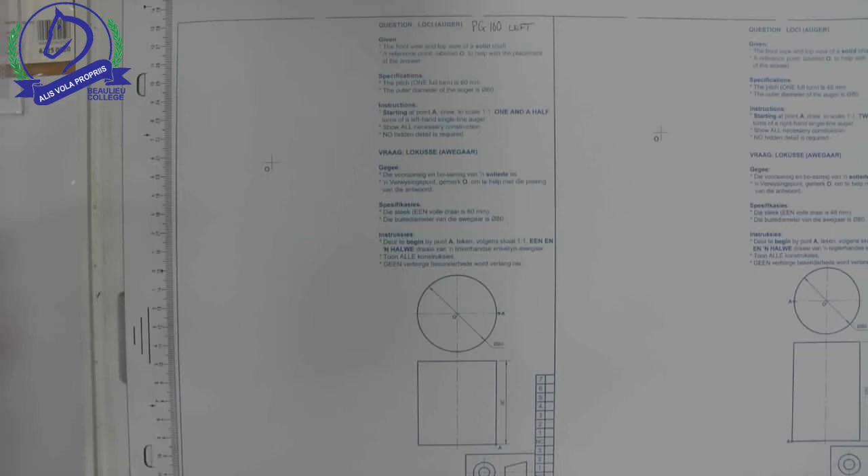Hello grade 11s. Today I'm looking at the Loci questions again, and this is page 100, the drawing on the left hand side of the page. They've given you a front view and a top view. Remember, this is in third angle orthographic projection.

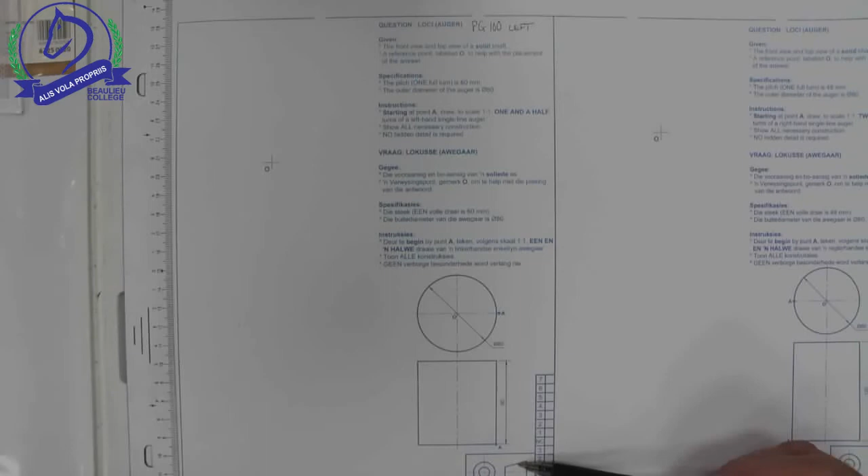They've given you the start point O, where they want you to start the drawing and help with the placement of your answer. They want you to do one turn is 60, a height of 60. Remember, we have to divide that by 12, which means that we're going to have a height that is divisible, and we can mark off height measurements of 5 millimeters. Starting point is A. Here is our start point.

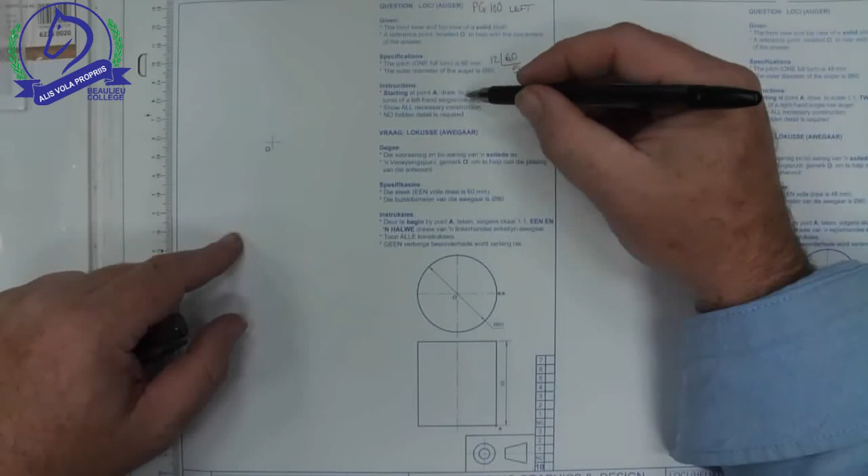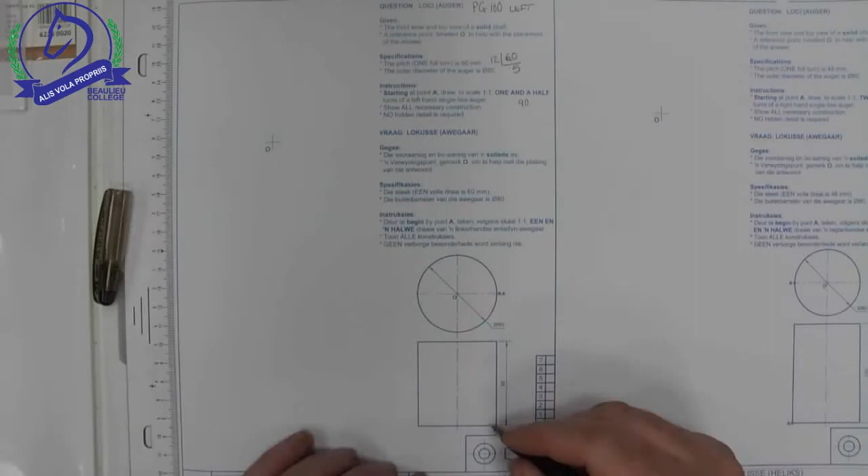They want 1.5 turns. So if it's 1.5 turns, 60 is one turn. Half of that would be 30. So that means our height should be 90, which matches the height that they've given us over here. It's a left-hand single line auger. So if it's a left hand, remember, if we're holding it in our left hand, this shape here, see the direction that our fingers are going, and that is the direction that we need to have, and it is 1.5 threads, 1.5 turns. So there would be one turn and a half. So something a little bit like that, just to give us an idea.

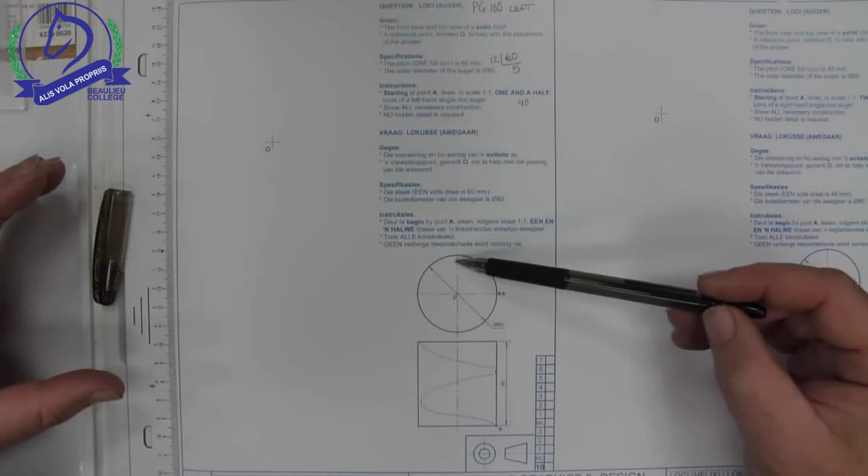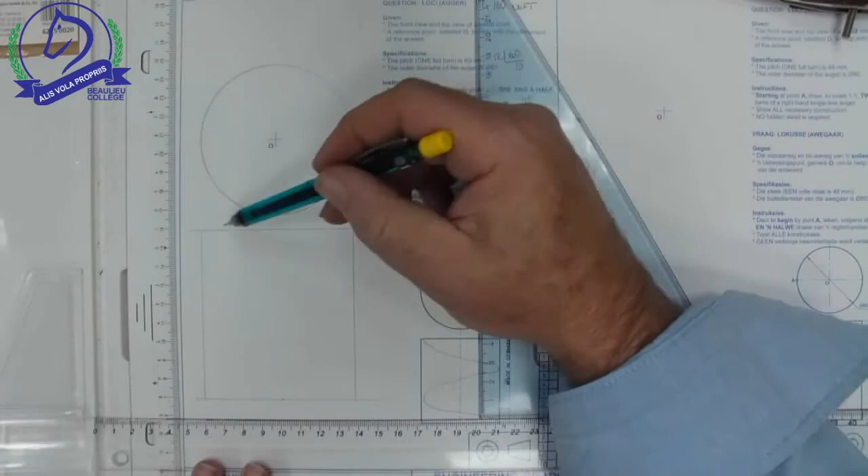So I'm going to follow the same process that we've done before. Try and remember the process. Draw the circle at our start point there, and let's draw our rectangle. After that, we're going to put in our pizza slices, and then we must also mark off the height divisions in our rectangle of the front view. There is my given circle with the diameter of 80, and the given rectangle with a height of 90, and that length which is equal to the diameter of 80. Next step is my pizza slices. Remember, this is going to be a center line, so might as well put that in here now.

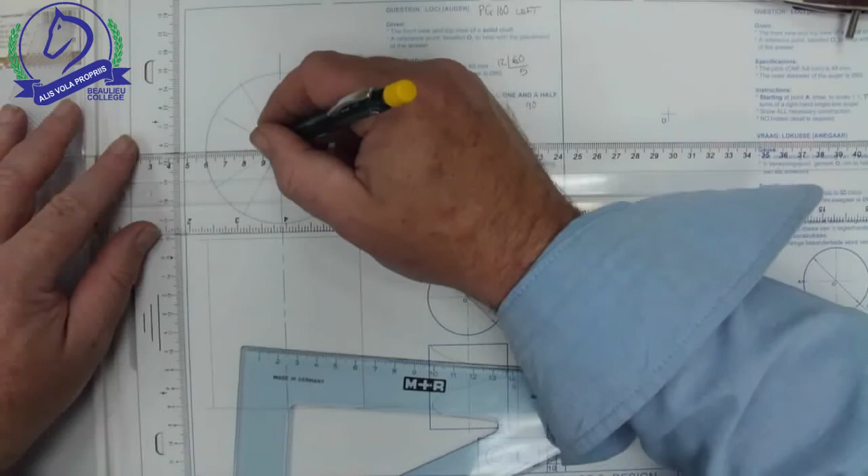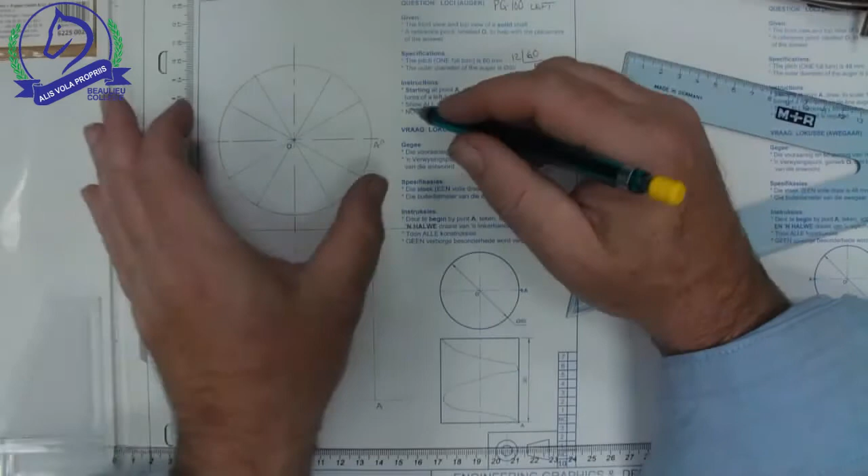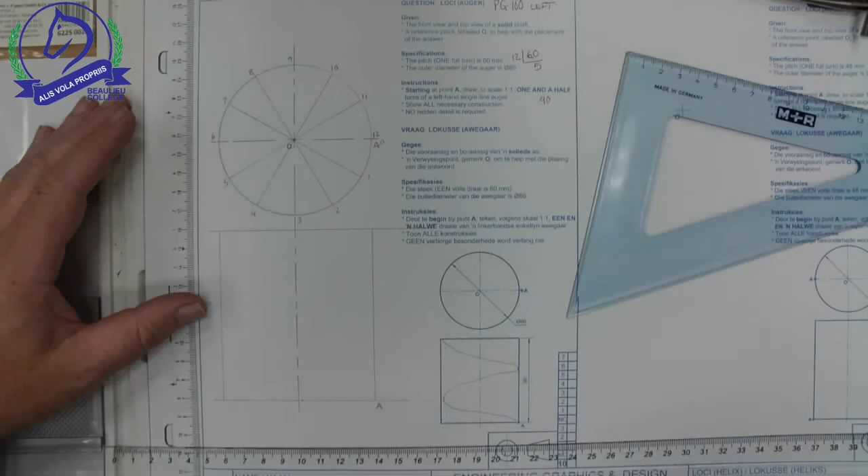I'm going to label now. So A is also my 0 point, because if I'm going in the left hand direction, so remember, if I was holding it here, my left hand direction is going there, I'd probably want to put my point 1 on this side, but it is not really a big issue. Now I'm going to do the height divisions.

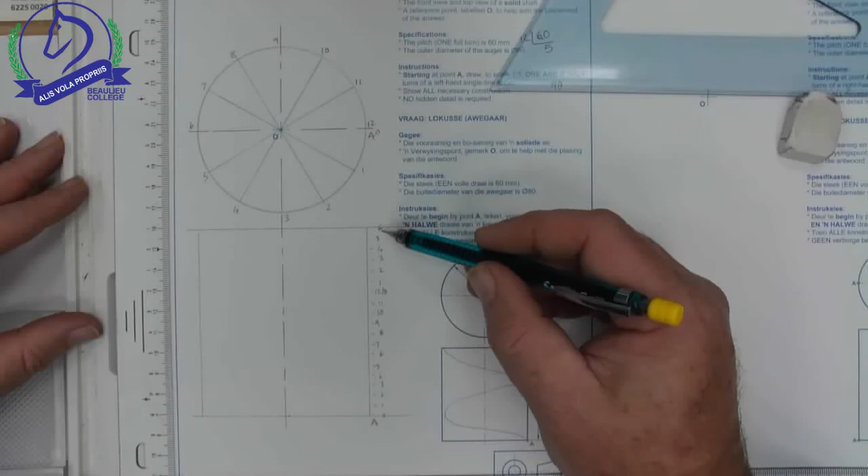There I've done my numbering, and I've also done my height numbering. They've said that A was here at the bottom, so A and 0 are the same point, up to point 12, which is also point 0 for the next half, and then 6. Please, if you mix up something with the numbering here, it should also tell you you've made a mistake. So if by chance 6 didn't fit in here, only came up to 5, you would also be worried that you've maybe miscalculated or something. So just check your numbering carefully.

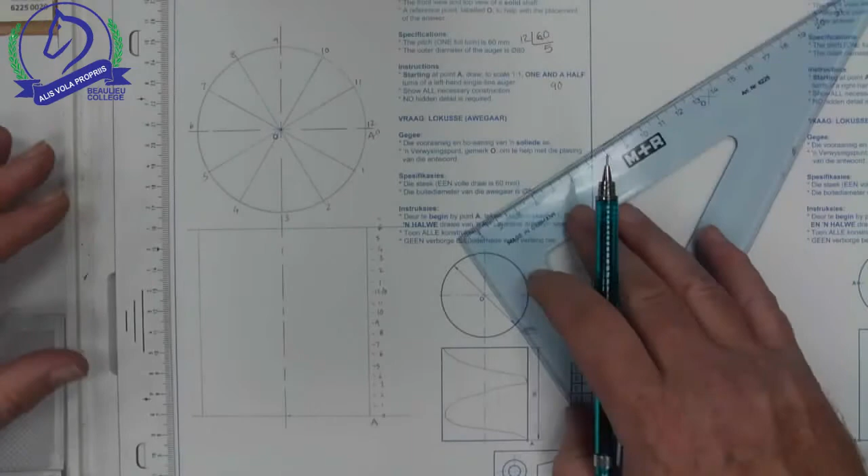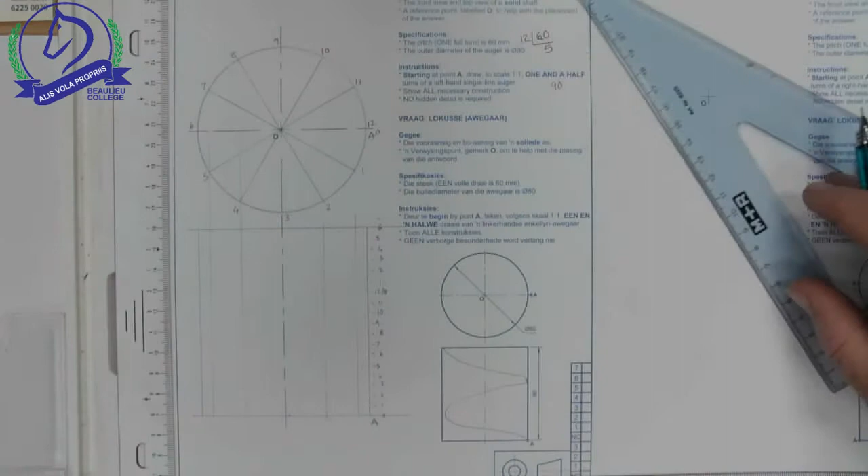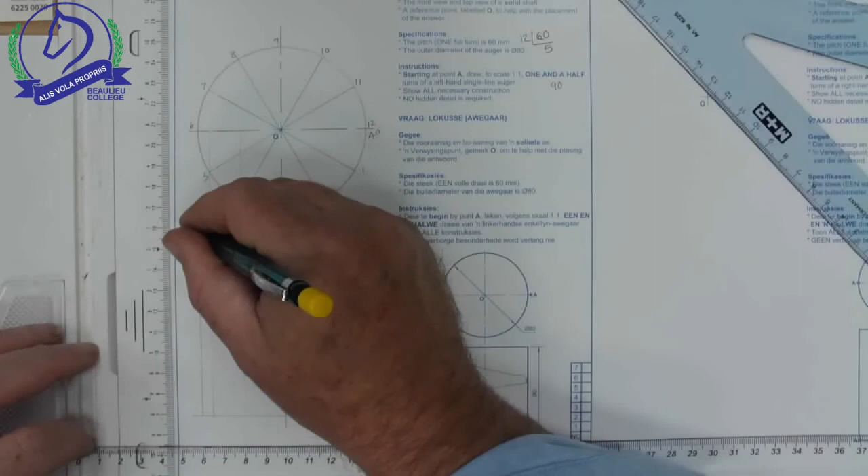Now what I did in my last drawing was then project my height dimension, my pizza slices down. So I'll do that method again. I think it's going to save me some time by doing this instead of turning this into a huge big grid. So there is point 0 and it lines up with point 0. Here comes line, if I label this 1 and 11, here's 2 and 10, here's 3 and 9, there's 4 and 8, here's 5 and 7, and there's point 6. So we have to line those up.

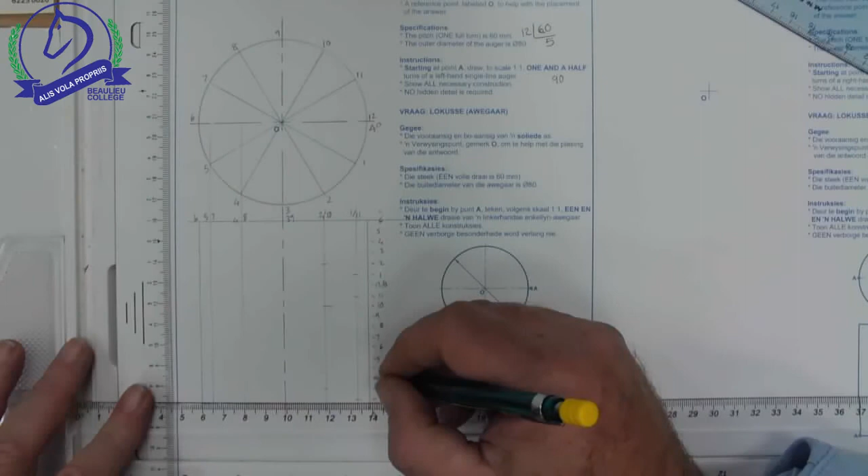So here's point 1, lines up with point 1. It's also going to be where point 11 is, and point 1 again. Point 2 is also going to be where point 10 is, and the repeat of point 2. Point 3 is in the center. Point 3 is also where point 9 is, and the repeat of point 3.

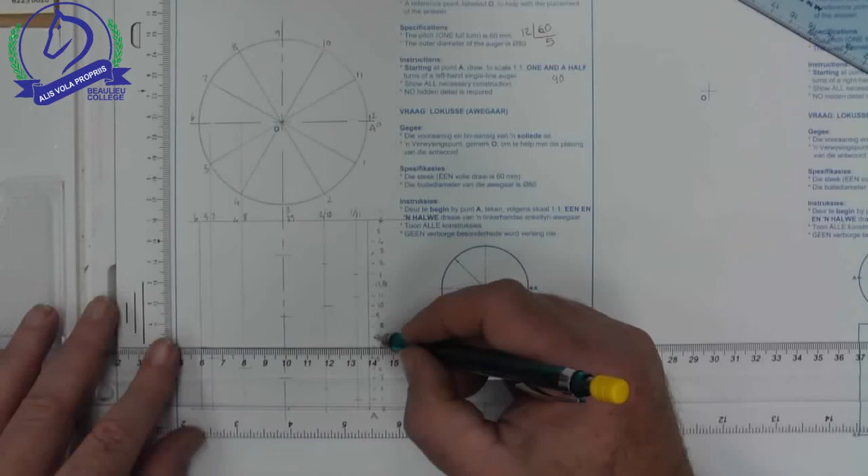Point 4, I'm just going to go one at a time now. Point 5, point 6, remember I'm lining them up with these lines. 7, there's line 7. Line 8 is lining up with line 8. We've got this side again. I stopped at point 4, so there was point 4 and point 5. So there are all my points that I now need to line up.

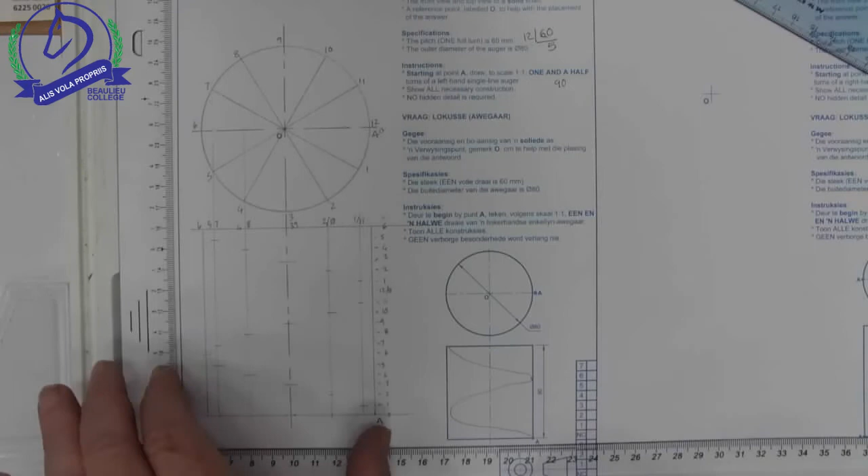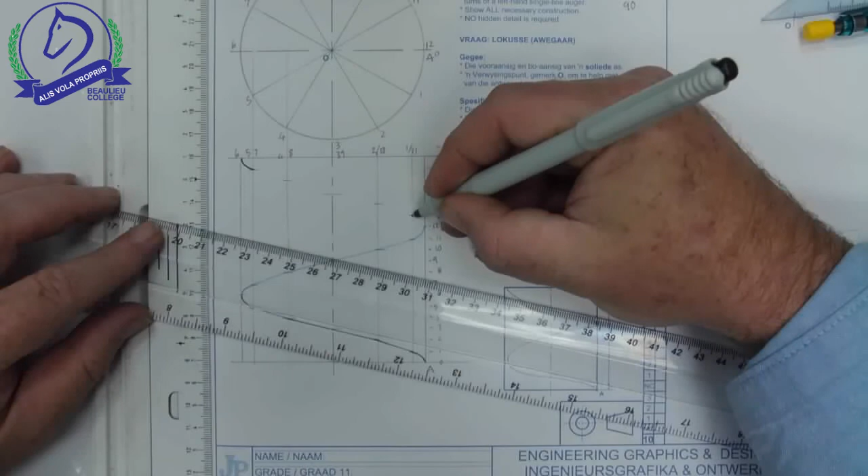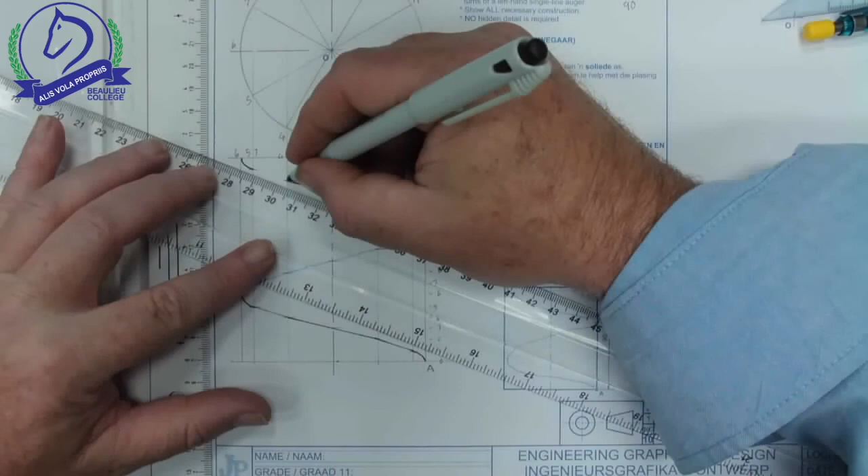Remember, it's a left-hand thread, so I'm going to see this side. That's going to be in hidden detail, or I don't think they've asked it, no hidden detail, so that would be in the back, and then it comes around on the other side. So I'm going to join those points up now. Curve that point. This point is very close to lining up with the other ones. These 3 in the center line up. We'll check for accuracy. And the last side is a little bit off, but you can still use a bit of a straight line for that.

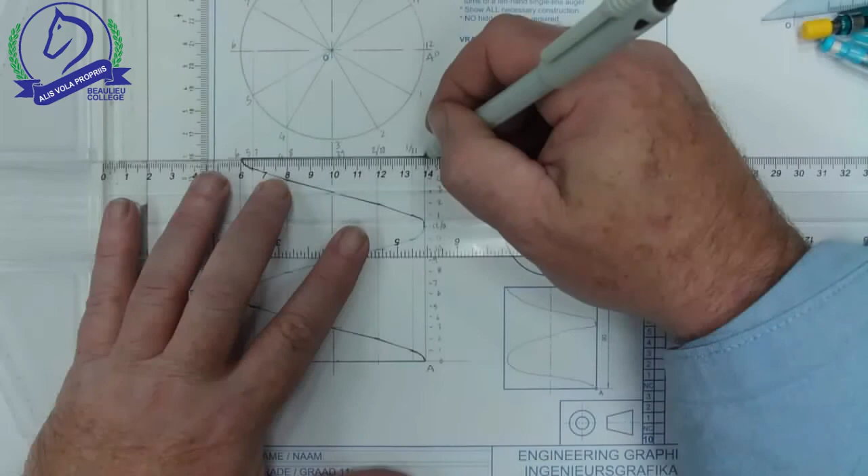Just go over the outline of my shape now. And that is pretty much the end of the left-hand side of this helix on page 100 on the left-hand side.